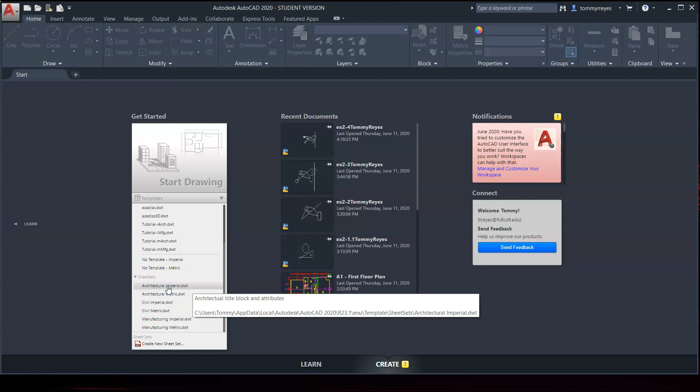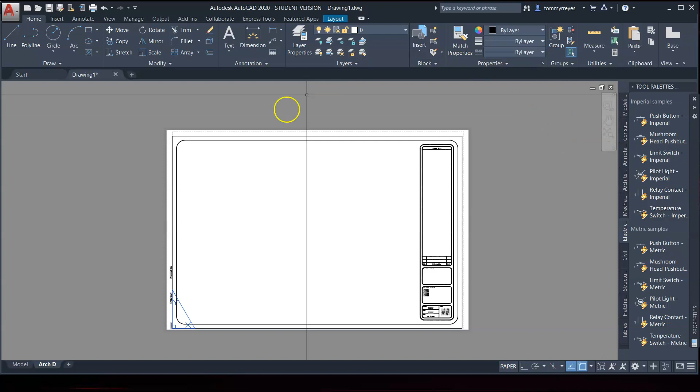There we go. We are in paper space, and I know in every video, just as repetition, because I want to repeat everything so you can start memorizing the lingo in AutoCAD. This is paper space, and then we got to go to model space to do all the work before we show anything in paper space. All right, let's go into model space.

All right, if you look at page 3-1, it says make sure we are on the 0 layer, and so I am in the 0 layer. If it says def points right here, just go into the 0 layer. Now for my Mac people, just find out where layers are, it's probably on this side, and make sure you're on the 0 layer.

All right, so what we are going to draw are rectilinear objects. Rectilinear, recti means up and down. So let's go ahead and start off with the bookcase.

Here we're going to use the rectangle tool. So REC, spacebar, and we're going to specify the base point. So 0, 0, 0. All right, where are we at? Over here. Okay, and then we're going to type in 3 feet, tab, 1 foot, enter. And this is our bookcase.

So this is going to go relatively fast.

So we're supposed to save these on as its own separate file. So Control Shift S, on a Mac it's Command Shift S. And let me go to my desktop. Let's go to AutoCAD, assignments, and let's change this to exercise 3-1. Save. And now that bookcase, oops, probably should have saved it as bookcase.

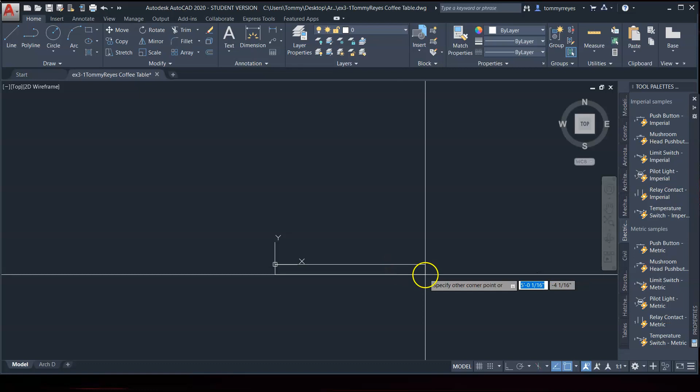All right, and it says let's erase this. So REC 0, 0, 0, and the first we're going to do is 3 feet 10.5 inches. Now I said you can

use decimals for entering dimensions when you're using the rectangle command, and that's exactly what the book is showing you. But if you want to really memorize how to enter in fractions, in case you come across fractions that aren't as forgivable as half, to convert half into decimal is just 0.5. So that's pretty a forgiving conversion. But something like, I don't know, 7/8.

That's a little bit more difficult to memorize, and so I would say get in the habit of hitting dash and 1/2, and that way you memorize this process of entering fractions. Now later on down the line, when you have this and it becomes second nature on entering fractions, by all means use 0.5. I do that all the time. There's no big deal in that. And so, but for now, if you don't really have entering fractions down, practice it more and more.

But when you mastered it and you know how to do it and you feel comfortable that you can just let go of practicing it and just put 0.5, then go ahead and put 0.5. So 0.5 tab, and we're looking at 1 feet 6 inches.

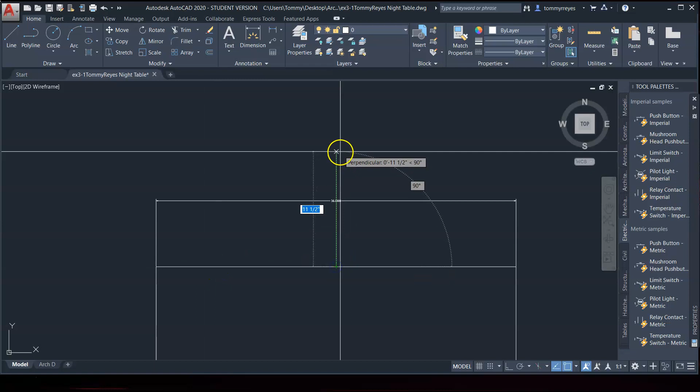So we need to take this 36 inches and make it 18 inches. Well, half of 36 is 18. And the book tells us to do it a certain way.

I know that if I use the stretch command, which they're telling us to do, I can hit the letter S, spacebar, select, and then I hit the spacebar. Now I'm going to grab from here, not here, because I want to make sure I use this endpoint. And watch this, I can stretch this in any way, but I want to make sure I am going to use ortho. I know the book says to use polar, and you can.

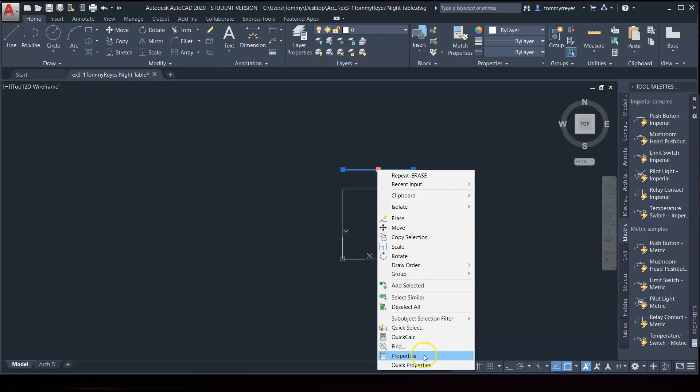And I'm going to use this endpoint to this line that I drew. And now I can see that from here to here is, in fact, 1'6".

And I already know this side is 1'6" because that's what I drew it from the previous drawing. And I'm just using AutoCAD to help me real quick to draw this line out here. And I just need to verify again, go to properties, and sure enough, yeah, 1'6". And so that is good to go.

And in case you want to know how I did exactly what I did with these lines: line, spacebar, I just go up and I just pick an arbitrary point that is away from all of these snaps. And then I go over here and I want to roll over this endpoint because AutoCAD, if you notice, let me zoom in, see that green dashed line? It's helping me, it's letting me know that

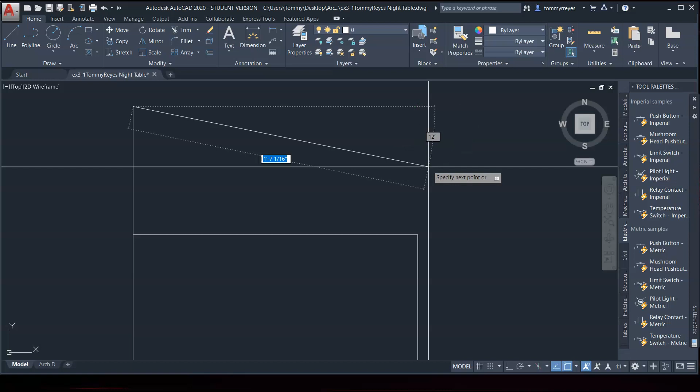that is 1'6" right there. Actually, let's undo and let me turn on my ortho. Control L, there we go, ortho.

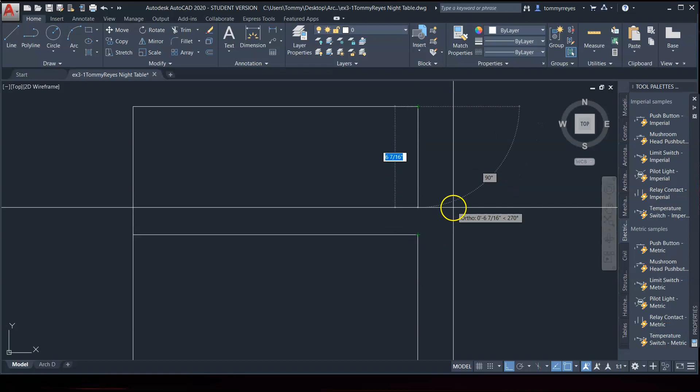And now, there we go, ortho's letting me know right here, this endpoint. Boom, done. And I know this'll connect as well. And that's how I'm able to create this line exact without having to come over here and do that.

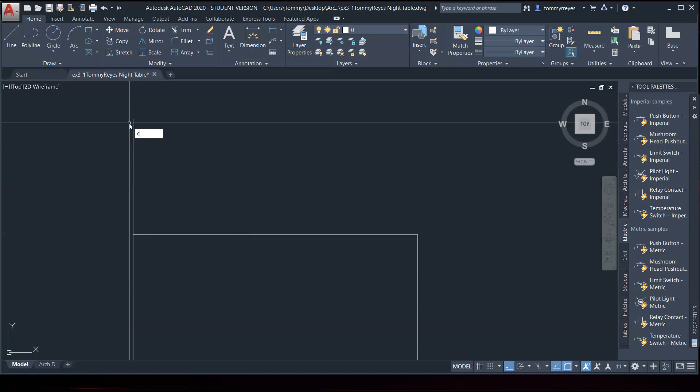Now there's another way to do it if you don't trust that, and I get it because I have a little paranoia as well. I could copy this line here to here. This is the exact same size line. Boom, there to there, and now I can delete these construction lines.

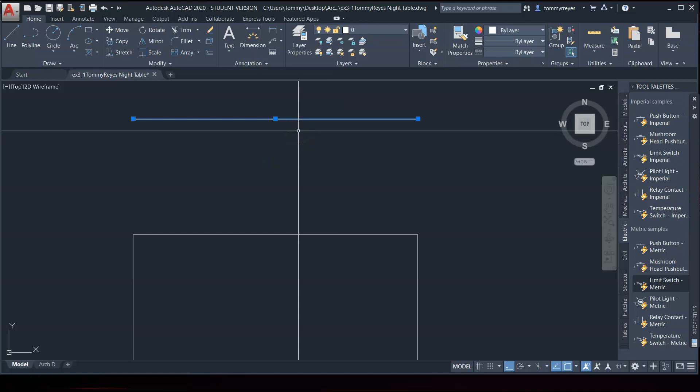We talked about construction lines. And voila, 1'6". And I know it's parallel to here because I drew one line, copied it, and bam. And I knew the exact distance from here to here and here to here are equally the same. Anyway, so that's a little construction line tip on how you can use AutoCAD to help you draft things perfectly with precision.

All right, so let me go ahead and save that. And now let's get into, let's see what's on the next page.

All right, the dresser on page 3-5. So we've got dresser 1, dresser 2, and desk 2. Let's go ahead and draft those real quick.

All right, so Control S for save, Control Shift S, and let me go ahead and change this to dresser 1, or dresser-1. Save. And we need to delete this rectangle, 0,0,0, space bar. We got 6 feet, 6 feet, tab, 2 feet, enter. That didn't quite work. All right, 6 feet, tab, 2 feet, enter. There we go, okay.

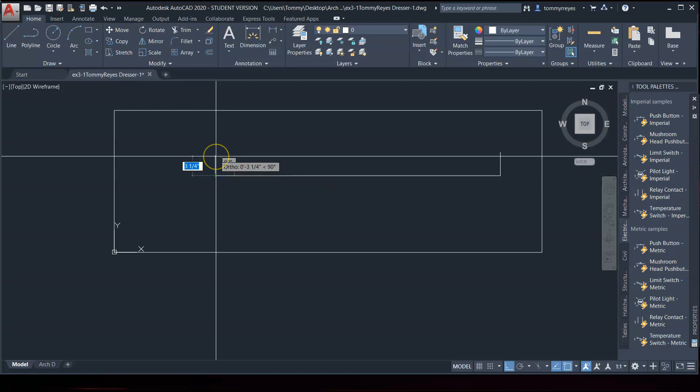And we have a 4-foot line that's separated by 2 4-inch lines. And so one way to draw it is, let's just draw a 4-foot line, 48 inches, enter. And then let's just draw 4 inches. And we can draw another 4 inches, or we can copy that. I'm just choosing to draw it. I'm also going to choose to draw it at the midpoint.

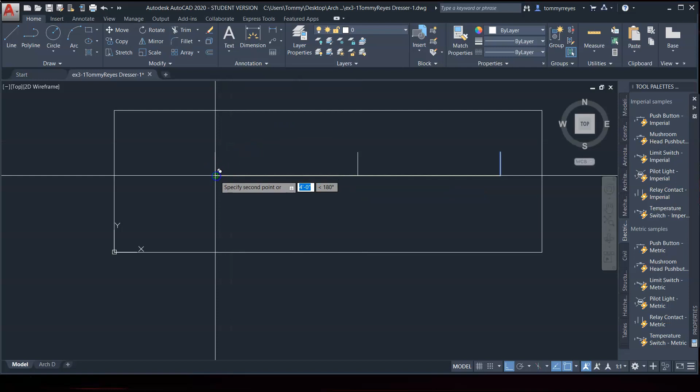Or you know what, instead of copy, check this out. Instead of drawing it, CO, copy, check this out. Spacebar, drop one at the midpoint, drop one at the endpoint. And now I'm going to move all of these to the midpoint, right there. Delete this construction line, because I needed to know the midpoint from here to here. And we have our dresser, and that one's done.

Control S, Control Shift S, and now we need to draw a dresser 2.

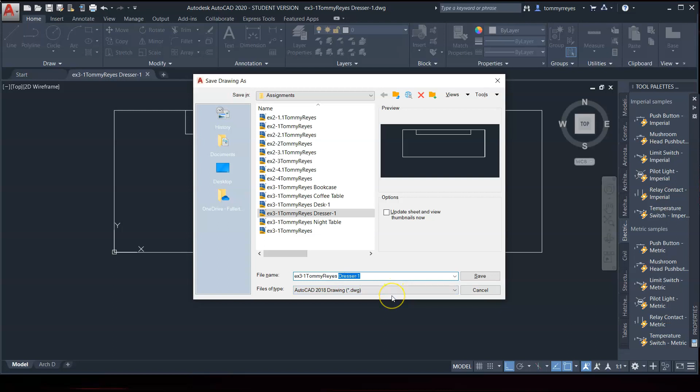I'm assuming this dresser has a mirror attached, like dressers you've seen with mirrors. So we can delete that. Using the stretch command, we can move this back from 6 feet to 3 feet, so 36 inches. Done, that's the dresser.

Save, Control Shift S, onto desk number 2. Save. Alright.

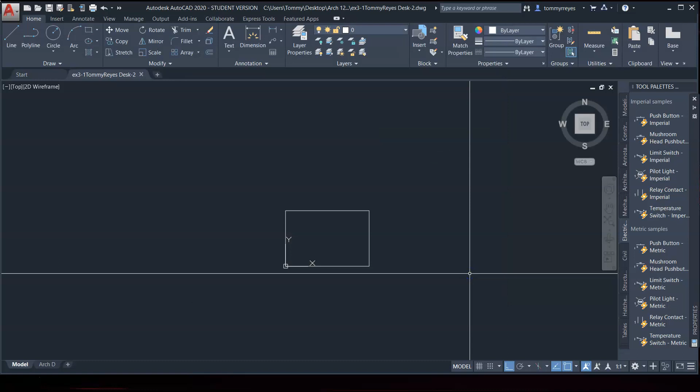So it looks like we can do rectangle, 0, 0, 0. We need 5 feet, so 5 feet, tab, and 2 foot 8, 2 feet 8, enter.

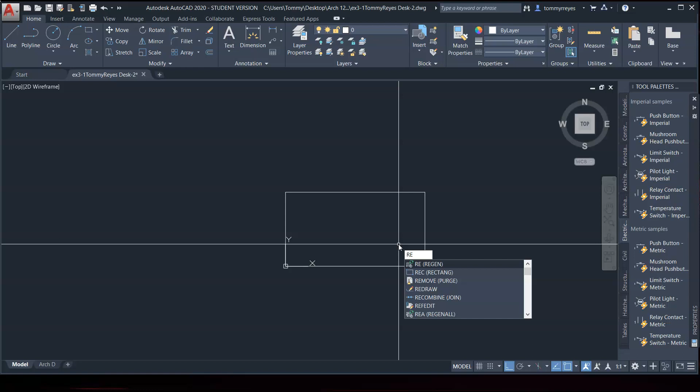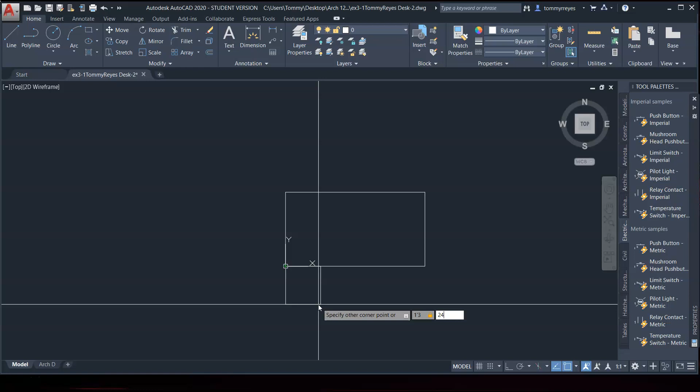Now we need to make another one. Rectangle, REC. Now we need to go 1 foot 3. We're doing the width first, like we typed in 5 foot first and then 2 foot 8. So now I'm going to tab over 2 feet or 24 inches, enter. I don't know why that went up like that, but I can move it.

Done, this desk is done. So the move command, let's back that up. Move, spacebar, select what I want to move, spacebar, grab the endpoint, stick it at this endpoint. Done, Control S, and that is desk number 2.

Moving on to the next item, file cabinet. And so that's just a rectangle. Control Shift S - oops, cancel. I don't remember if I saved this one, so Control S just to be cautious.

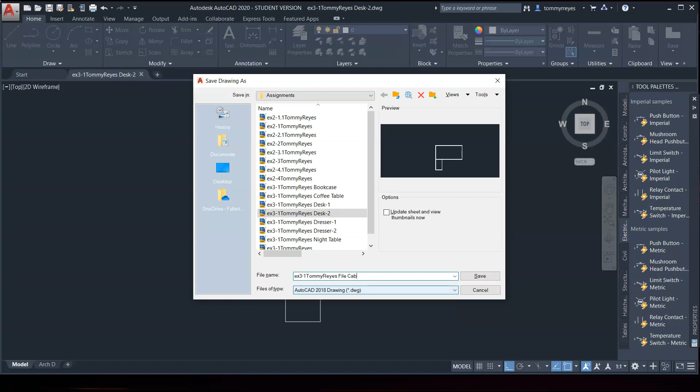Control Shift S, and now we got file cabinet, and this is just a rectangle. Go ahead and delete this. Delete, REC, 0, 0, 0, space. We got 1 foot 3, tab, and 2 foot 3. Enter. Done. Control S for save.

Control Shift S for save as, and now we're going on to the chair, number 1.

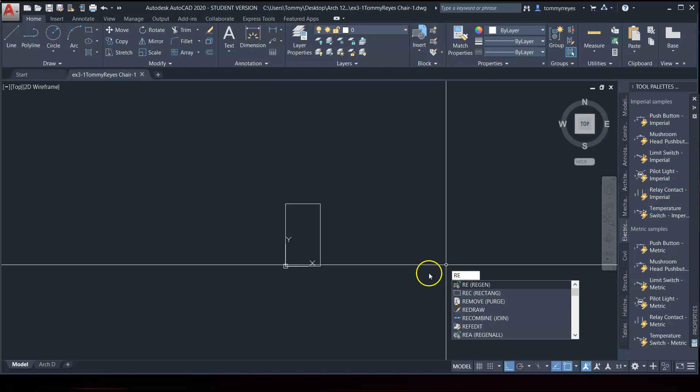So the chair can be drawn well, it can be drawn in several ways. So we have rectangle - let's delete that. Rectangle.

Space, 0, 0, 0, enter. Now we're doing 2 feet 8, tab, and 2 foot 3. I probably could have stretched the filing cabinet from 1 foot 3 to 2 foot 8, but oh well, all right.

Enter. What just happened? Zoom extents. Delete. I don't know what just happened. All right, I made something.

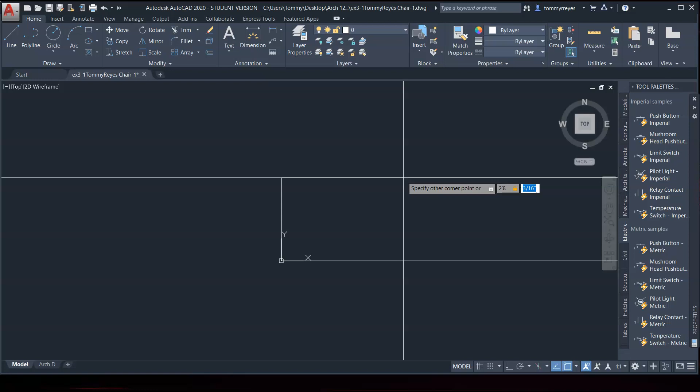So 0, 0, 0, enter, 2 foot 8, tab, 2 foot 3, 2 foot 3, there we go. Okay, and it looks like the inner rectangle, just going to make it over here, is 2 feet, so 24, tab, 2-3.

I want to move this to here, grabbing the midpoint. Then I want to move this down 3 inches. And we have this part - how do we get rid of this part? Trim.

We can trim from here. It selects, and it's not showing you how to use trim right now, but I'm showing you because this is really easy. So we selected the objects we need to trim from, spacebar, and bam - this chair is done. Spacebar, I'm out of the command, and that is done. So that was the trim command.

Let me go ahead and do that one more time. So TR for trim, spacebar, select the objects - this whole is one object, that's why it's a little blue. If I hit spacebar, I'm trimming from anything that's between here and here. So spacebar, I'm telling AutoCAD I want to trim this. I just left click on it and it's gone. Spacebar, I'm out of the command. Alright, so that's how you use trim.

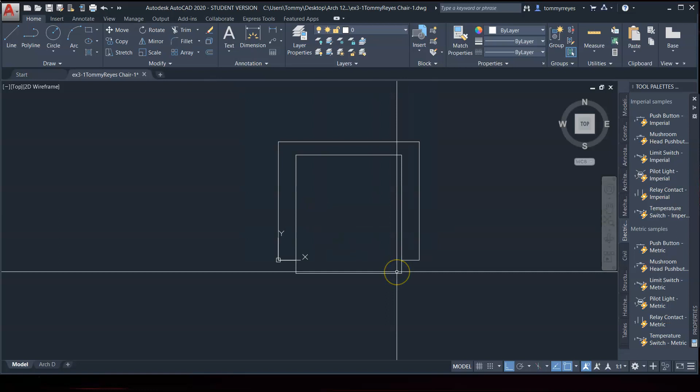Control S, Control Shift S. Now we need to make a sofa.

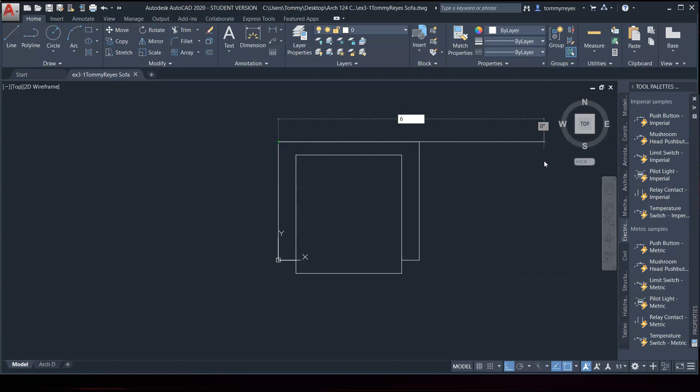There we go. We need to stretch this from 2 feet 8 to 6 foot 2. I don't want to do the calculations, so I'm just going to draw 6 foot 2 inch. Enter. I'm going to draw straight up because this is where I'm going to end with the stretch command.

Watch this: stretch, spacebar, select. It's important where you select - you got to select right anywhere before over here. So anywhere, like I could select here and it'll still stretch, but if I go over here, it'll stretch differently.

So it'll stretch from this cutting plane where you see, and I'll give you an example. So I select right here, spacebar, and now I want to move this over to here, and I know that's perfect.

But let's go back, stretch, and what if I go over? Let's see what happens, look what stretches. So you have to make sure that when you stretch, this line you stretched, this line you stretched, but none of these were stretched. So let's go back.

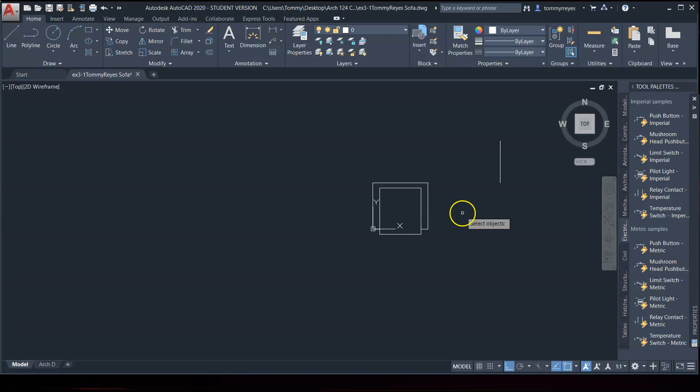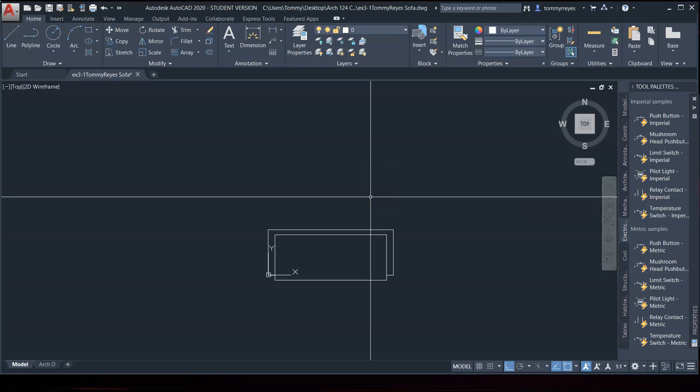Stretch. I need to stretch these two lines right here and this line. I don't need to stretch this small line right here or this small line right here. So stretch, I cut through that, move over, done, escape. Delete this construction line. Control S, save, Control Shift S, and we're moving right along.

We are going to do a double bed. Our bed size is the double.

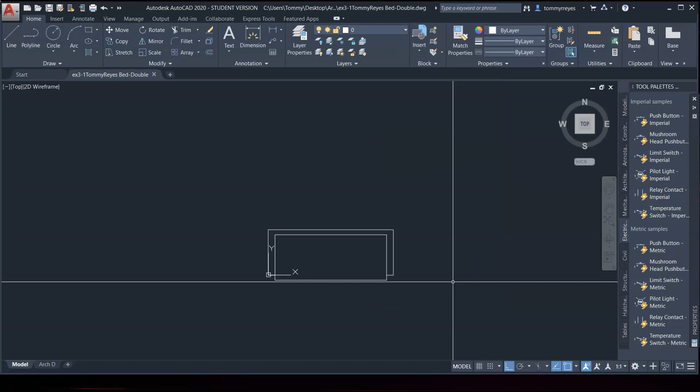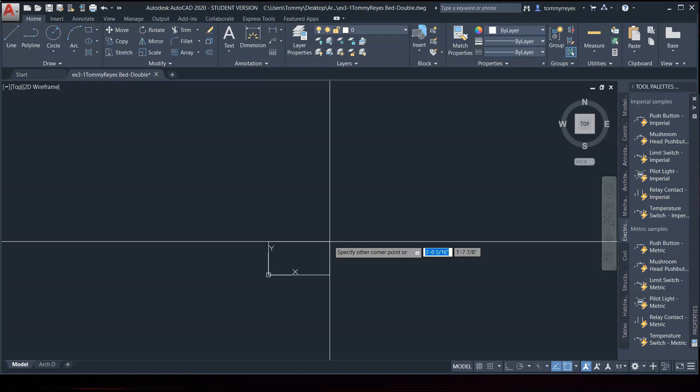Go ahead and hit save. And it looks like we need to delete this, so rectangle. REC, 0, comma, REC, yeah, 0, comma, 0, comma, 0. Space bar. And it looks like we need 4.5 feet. Tab, and 6 feet 8 inches. There we go.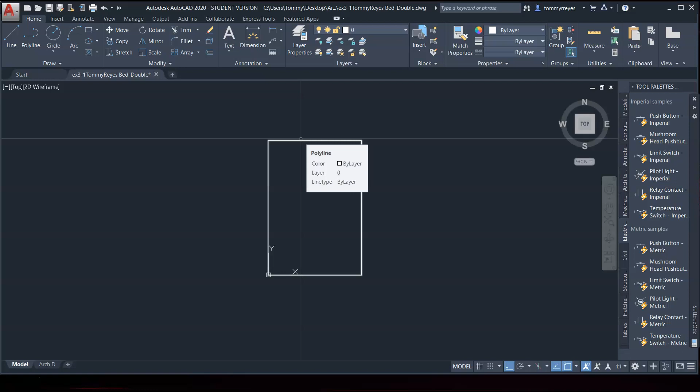We need to draw a line that's parallel to here, that's 3 inches away and 1 foot 4 inches away. So here's what I'm going to do.

Check this out, I'm going to draw another line. I'm going to use the offset command. Now, it doesn't really show you the offset command right here, but I'm going to show it to you because I think this is a good spot to show it. There's a lot of things that you already know, so there's several ways to do it.

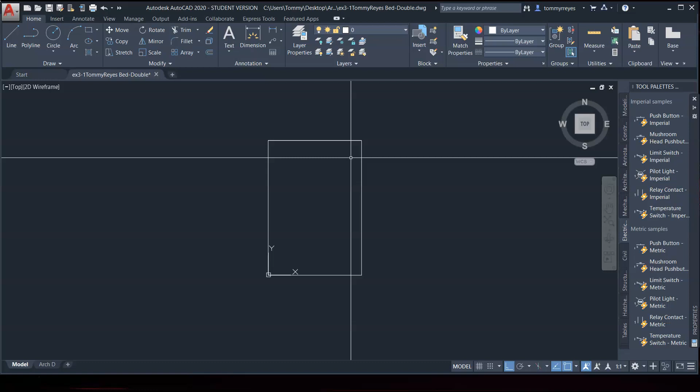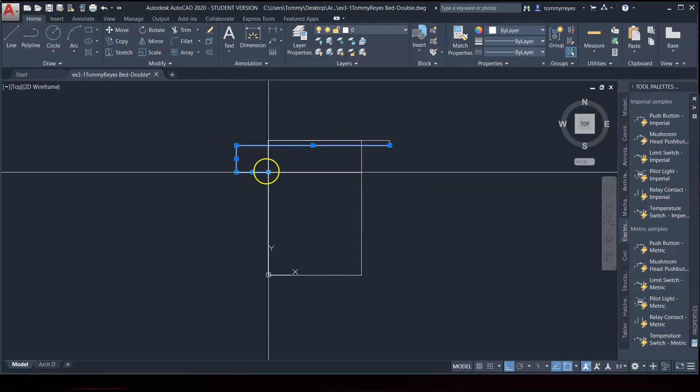I can go right here, draw a construction line, come down 3 inches, come across, come down another 1 foot 4 inches, and I could actually stop there and then just delete that. Delete that. I can take these grips, move them over here. And that's one way to do it.

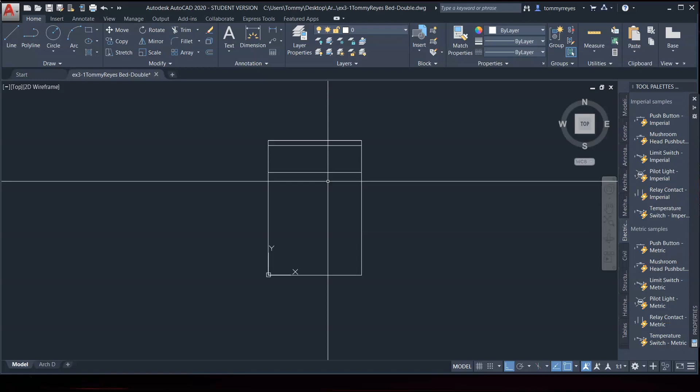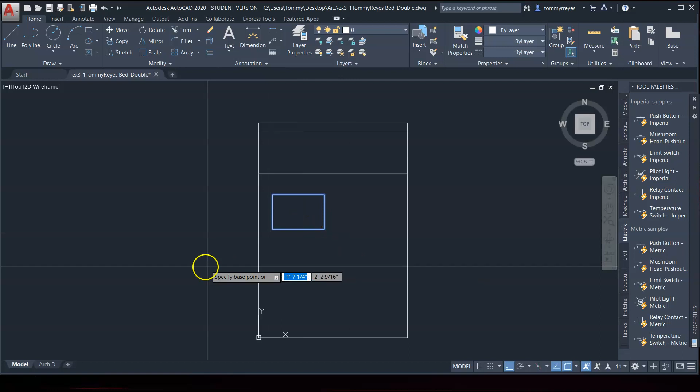Let's see, these pillows, it's not really saying what these pillow sizes are. And so I'm just going to do rectangles, REC. And looks like probably something like this, maybe a little bit.

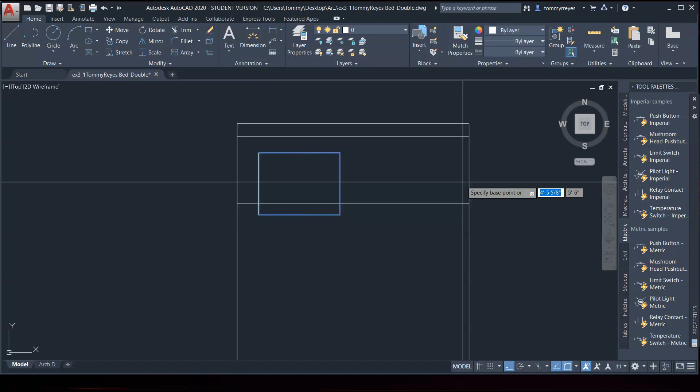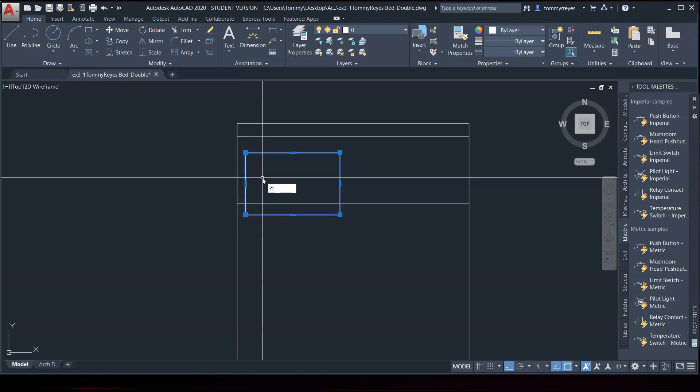Maybe we're going to need to stretch this a little bit, so I'm using stretch command. There we go. And then I'm going to copy, CO, and I'm going to copy. Oop, no, I need to stretch this some more. Stretch. There we go. Copy. And probably need to stretch this a little bit more. There we go, delete that. Copy. And that looks more like it.

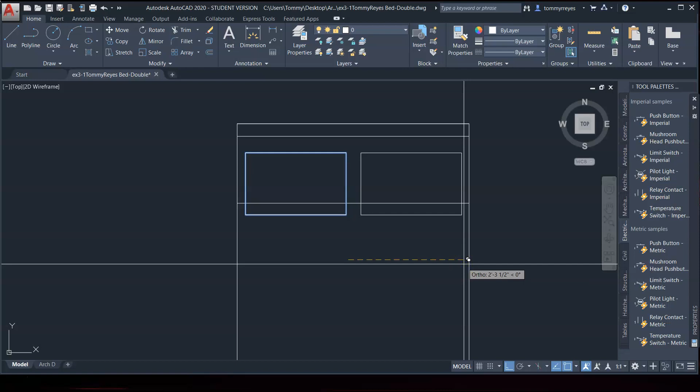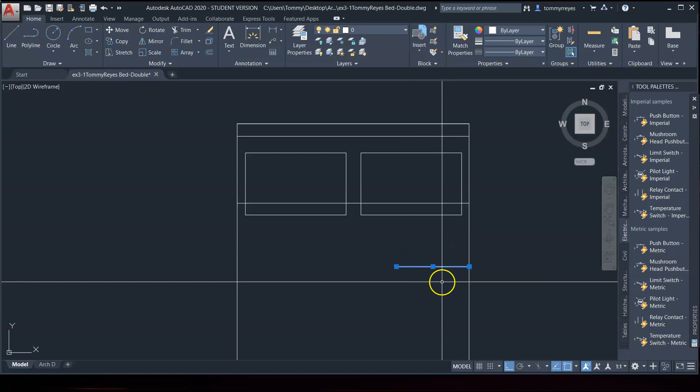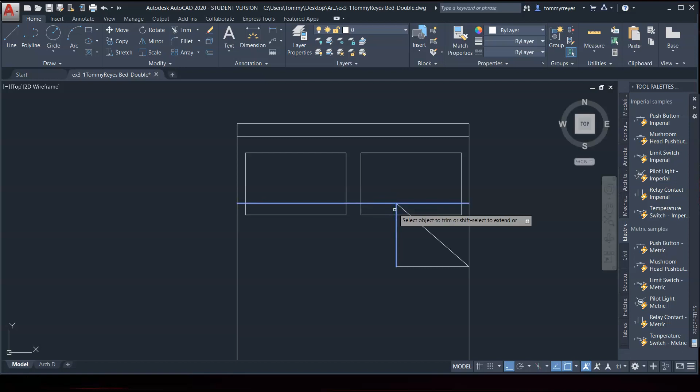And so now there looks like a right triangle here. It's not giving us the size, but we can guesstimate. And now I can use trim, to trim here, here, and just use trim again for here and here. And there you have it.

The bed is done, double bed is done. So Control S for save. This was the double. Control Shift S. Let's do queen.

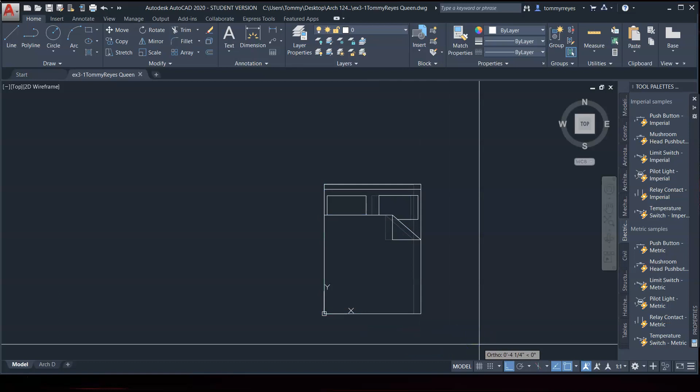And now we need to stretch this 6 inches. Stretch. Right in between. 6. Let me explain exactly what it is. So S, spacebar, and right there, cut in between, spacebar, and I'm going to select over here so I can move over 3 inches. Check this out. 3. And do the same over here and move this 3. And now what I want to do is move this over a little bit and move this over a little bit.

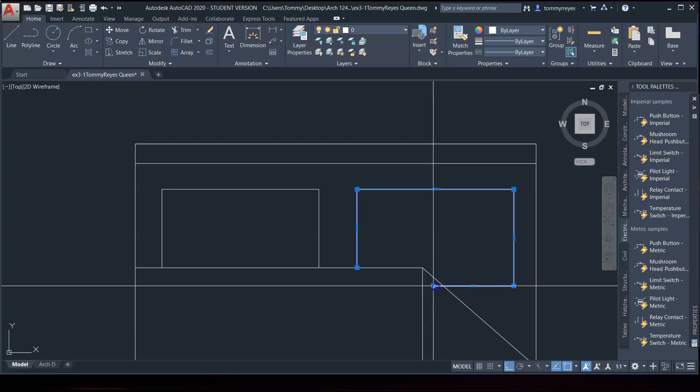And then I could use the trim command or I can move it like that. And then queen is done. Control S. And now we need to do the king.

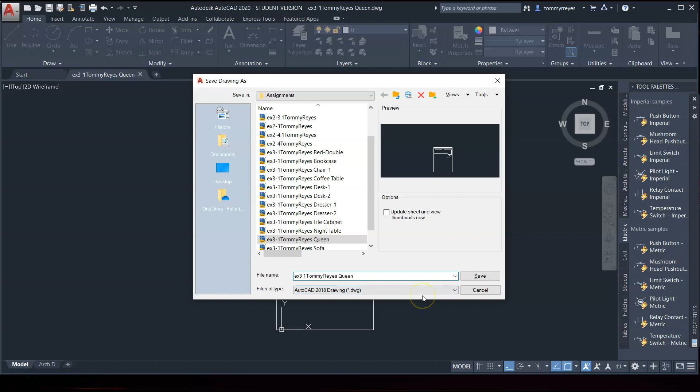Now we need to stretch this to 6 feet. So Control Shift S, let's type in, I forgot to put bed dash queen. So bed dash queen, save, Control Shift S, bed dash king.

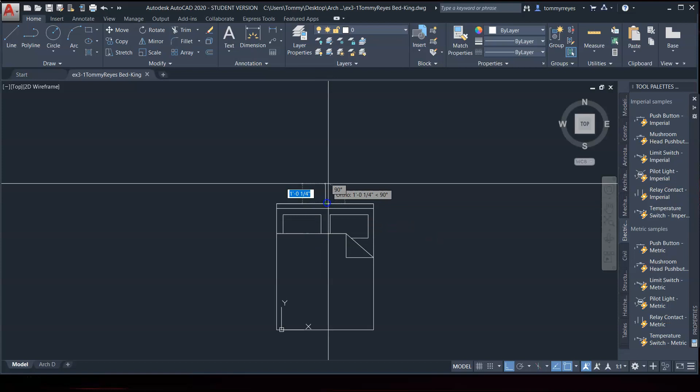Alright, the reason why I stretched this over 3 inches this way and then this way, because we need from here to here to be, we needed it to be 5 feet.

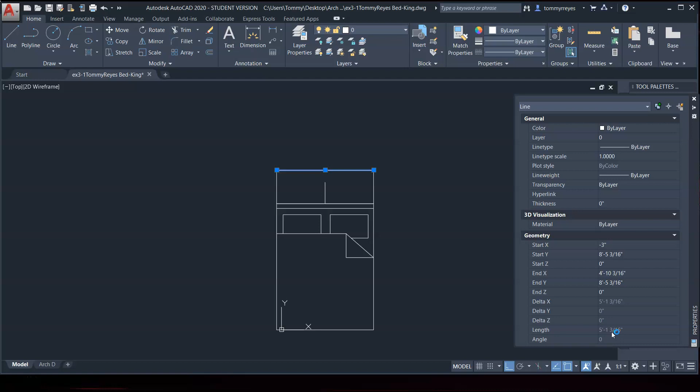So I'm just going to copy this line, this construction line that I did. Make a new line. Check the properties and look, the length was off. So I did a boo-boo. Let's find out.

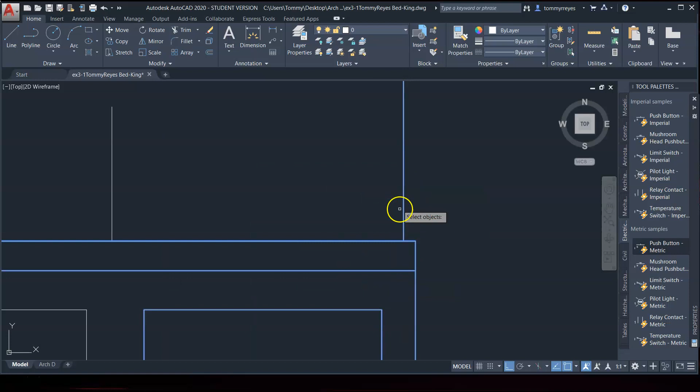We need this to be 5 feet. Delete, delete. Length 5. Yep, we were off just a smidge. Alright, so stretch right here, come over here, and there we go.

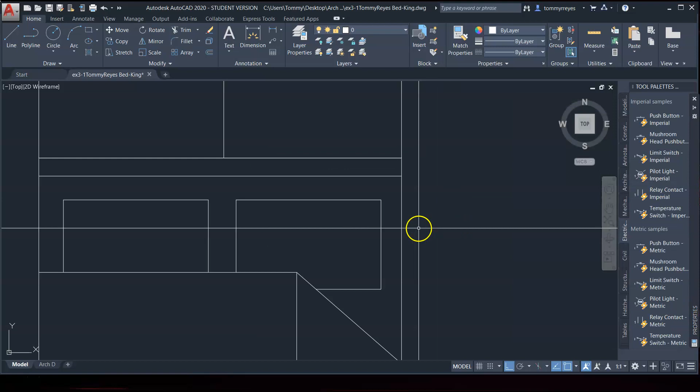And that happens sometimes in AutoCAD, and this is why you got to double check your work. And now we're at 5 feet. Okay, that is great.

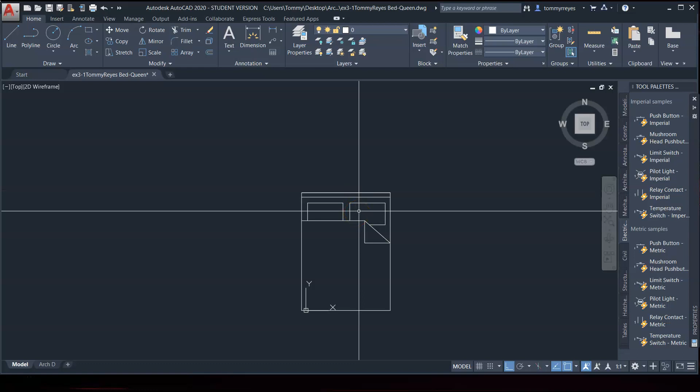Now I got to actually say Control Shift S. And I'm glad I did this because now I need to save this as queen because I just fixed the queen. Do I need to replace it? Yes, I do. And now I fixed the queen, so this happens. This happens, you're on a roll, and you forget to double check, double check. So now we need up, and we need to copy this.

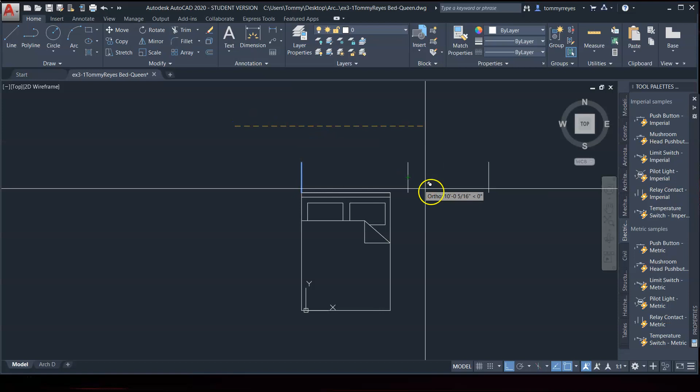And I'm just going to select over here, arbitrary spot, 6 feet. That's where we need to go. We need to go 6 feet. And if I need to verify that this is 6 feet, draw a line here. Yep, 6 feet it is.

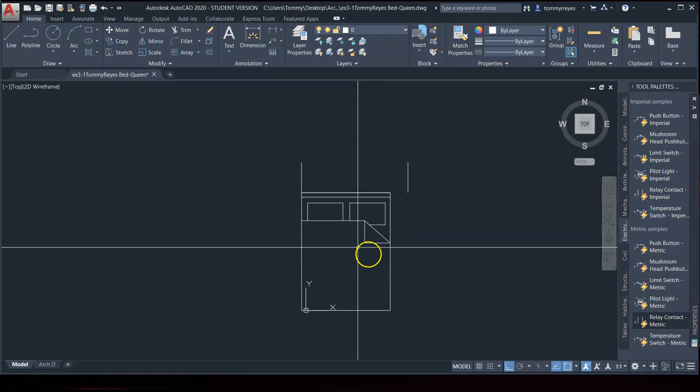Okay, I'm going to delete that. Stretch. But I want to stretch 6 inches this way, 6 inches this way, because I don't want to distort and have to redraw anything. So let's do this.

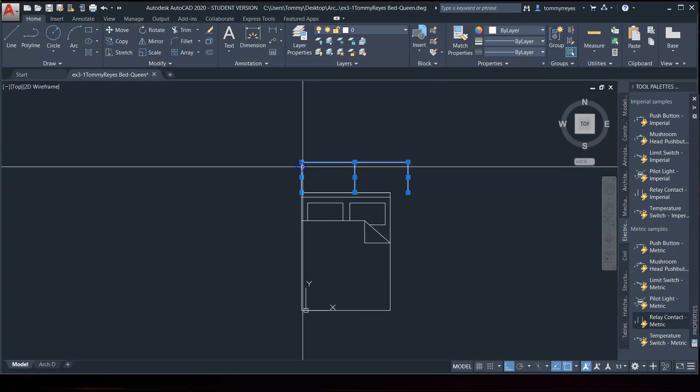Let's copy this. And yeah, let's move this over, move to the center. That way we know all we have to do is stretch this. Stretch, S, spacebar, stretch this from here to here, and then stretch this. There we go, here to there.

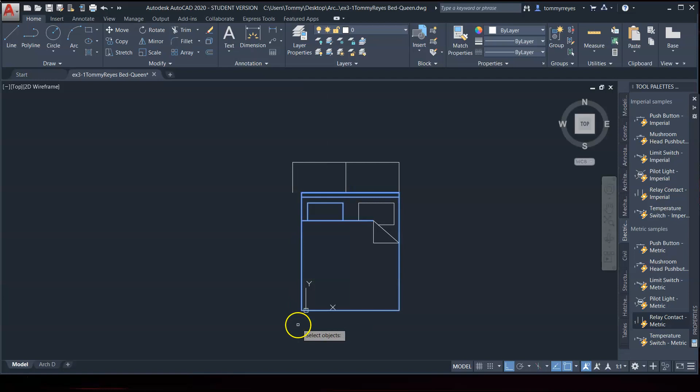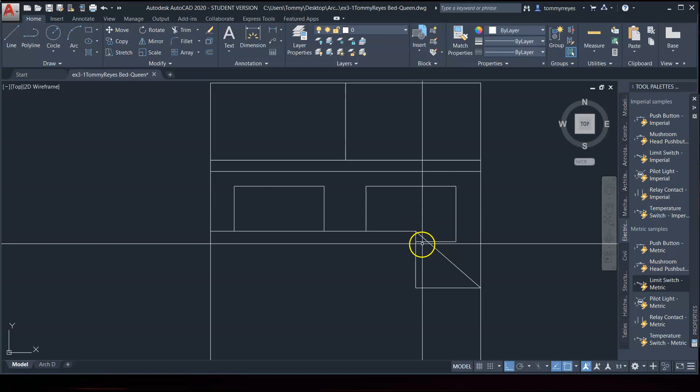And I know this is 6 feet. Probably should move this over a bit. Move. There we go. I can grab this and snap it to there. Delete that and Control S.

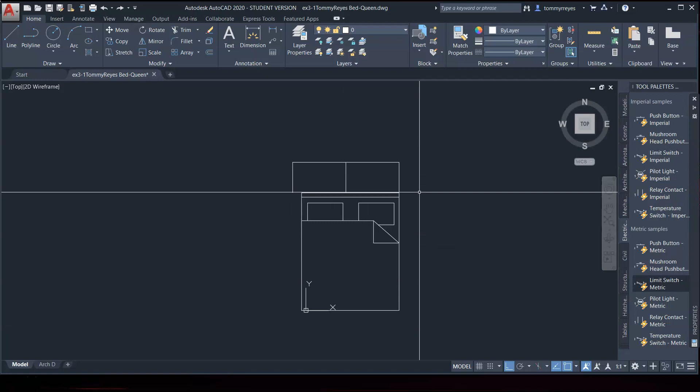Oop. Dang it, I saved that as queen. Control S. Control Shift S. I gotta fix this. So I'll go back to king. Yes. Alright, stretch.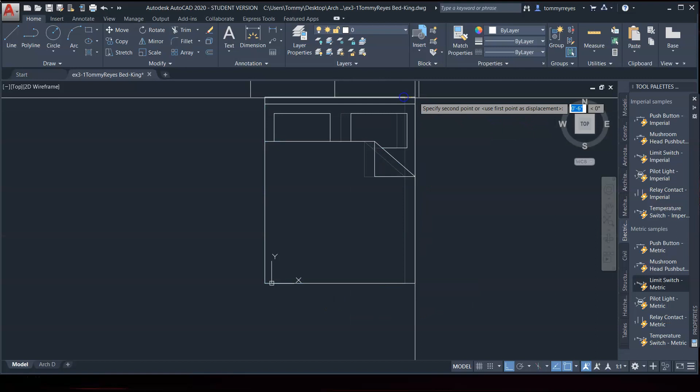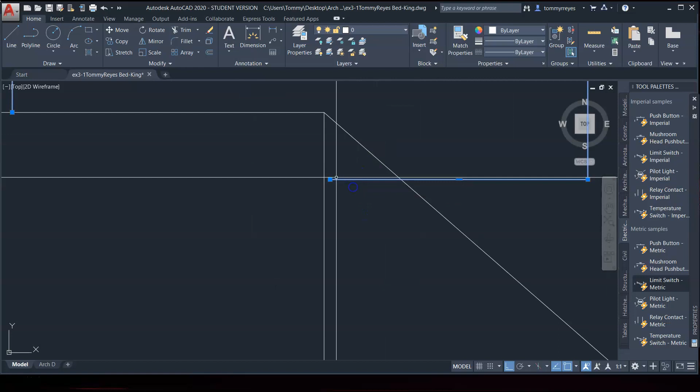And I'm glad this happens, because you guys get to learn from simple mistakes when you're trying to go quick. Move, spacebar, move that over a little bit. Let's move this over a little bit. That way you don't have to redraw anything. And you're just fixing very little.

And so that's the mindset of a drafter. Try and do, and I consider it, yeah, let me replace that. I consider it like a game in my head, where what's the minimal amount of commands I can use to execute what I need to execute. And you saw just what I did using the move command.

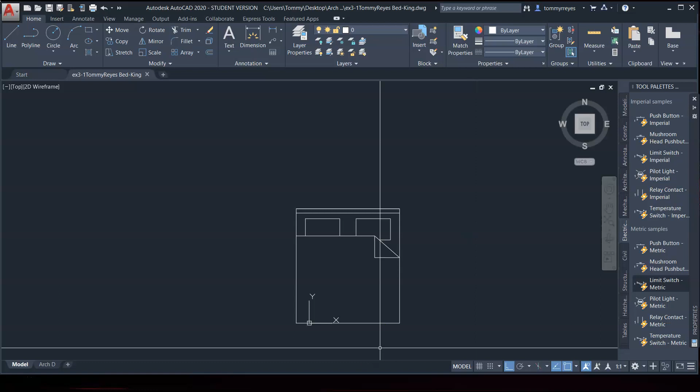And in fact, let's go here. And I want to view by, let's view or sort by type. Alright, this makes things easier. So we just did exercise 3-1. We did the sofa, queen, here's the king.

So this file I can trash. I can see, let's say view, extra large icons. Alright. Maybe just large icons. Yep, here we go.

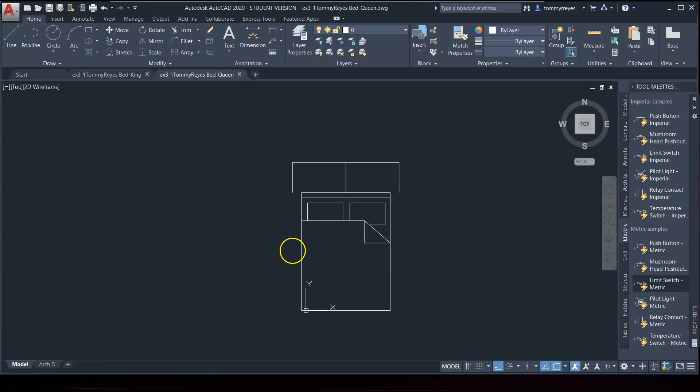So king, that's the right one. Double, that's the right one. Let's go to queen. Queen, I need to fix this one, because I deleted those construction lines. And I need to remember that this needs to be 5 feet. Okay, great. I'm just double checking my work.

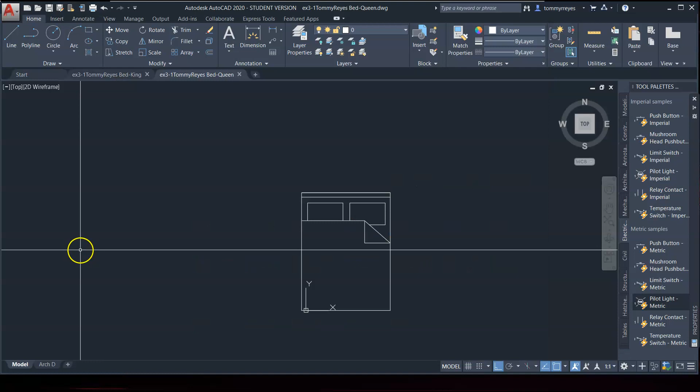Control S. So I had to double back and make sure that the queen that I saved is correct. And let me go ahead and save. Close that out. Here's the king. And let me go ahead and double check my files.

All right. So, sofa, night table, file cabinet, dresser 2, queen, bookcase, chair, coffee table, desk 1, desk 2, dresser 1. Assuming we're going to do a dresser 2 eventually. King, double. Okay, that looks like that's it.

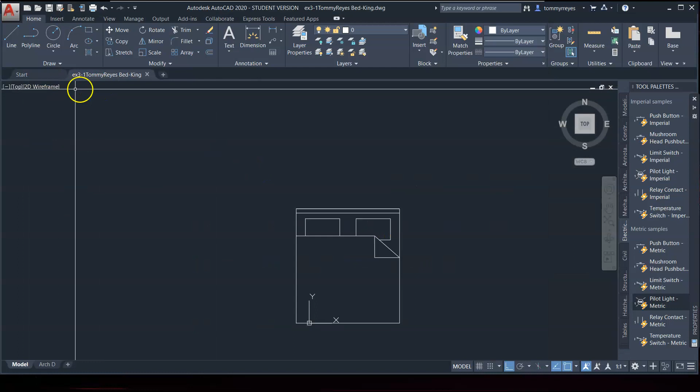Let's go back to king and control shift, or I'm sorry, control P. Don't forget to publish your files into PDF. And so AutoCAD PDF general documentation, and instead of display, let's go to window, and just like the rectangle, we're just going over the portion.

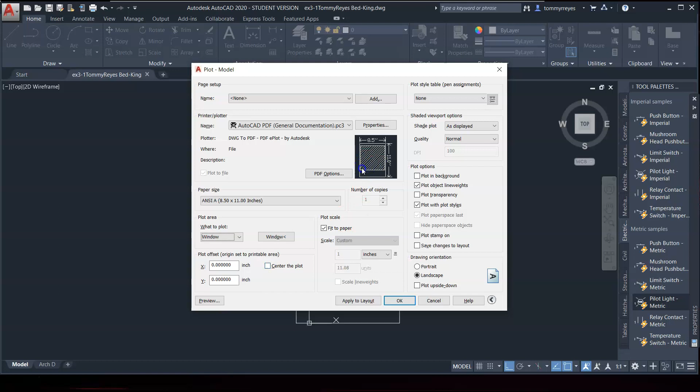And you can see with this hatched box, that's where the drawing is. That's roughly how big it is. Now if I center plot it, it's going to move it to the center. If I want to preview it, there we go. The majority of what I'm about to make a PDF out of, or print, is going to be on the majority of the page, and so all I'm saying is to maximize the amount of space using window for the drawing. So we're essentially scaling up the drawing to print out in the maximum amount of space.

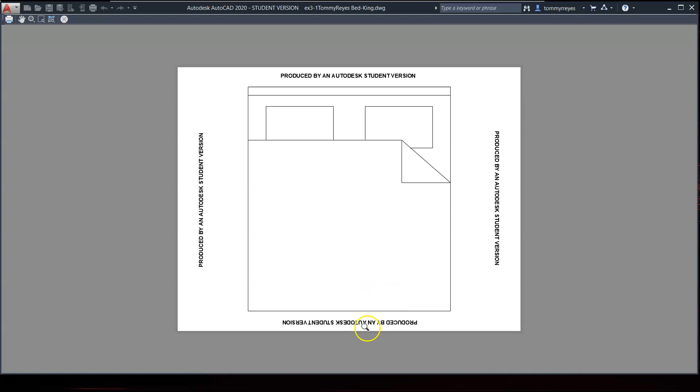So if your drawing is like this big, I know that you didn't use window, or if I only see like the top half of the bed, I know you didn't hit center plot or fit to paper. Window, again, I need to come over here and select. So make sure you're doing that with all of your drawings and continue.

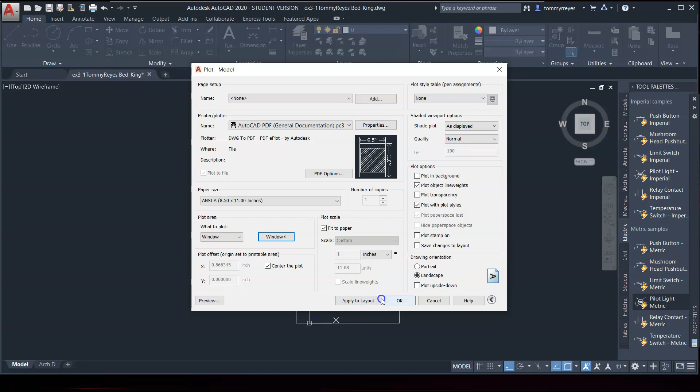Let's see, PDF, hit OK, and it saves as PDF. Done. There you go. The majority of my drawing is on this 8.5 by 11 size PDF. And let me zoom out so you can see what I'm talking about. From here to here is 11 inches.

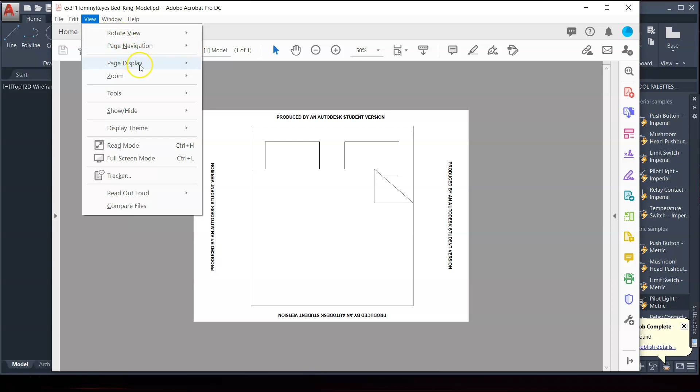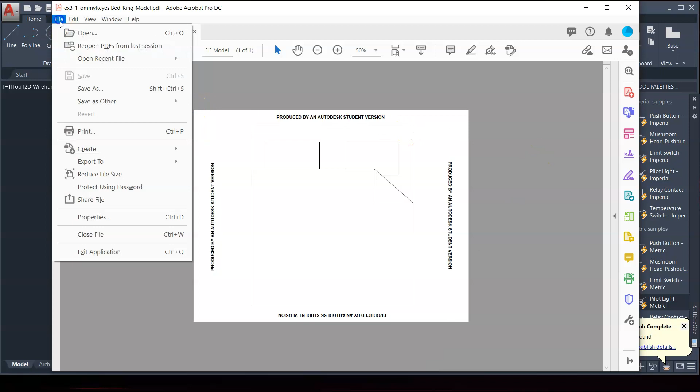I wonder if there's a ruler. Yeah, there's not a ruler. Oh, wait. Here. No. Anyway, if I go to print this, I know this is 11 inches by 8.5 because it says it right here. Anyway, that is all.